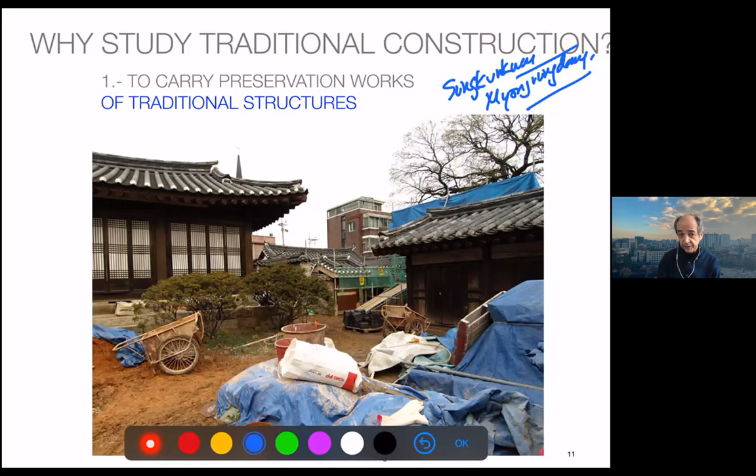sorry, to keep that heritage, and could be any monument, you need to be very familiar with those techniques so you will not spoil the building. And that's a very important part of the traditional construction techniques, right? And Korean traditional architecture has a difficulty there, but we will speak about that next day.

Then we have to extend and renew old buildings. This is the famous Gothenburg City Hall, renewal by Asplund. This is an architect which comes sometimes. This is the original building, which actually is a building which underwent many extensions and many renovations. And this extension by Asplund. And well, that building was controversial. Now we consider it as a model, an example of building extensions and renovations.

But Asplund used new techniques. It is a steel and concrete building, but he was very much aware of the materials, the composition, and he did many interesting compositional tricks to have this extension working well, right? Interesting building, you may study it because in terms of design, especially interior spaces are great.

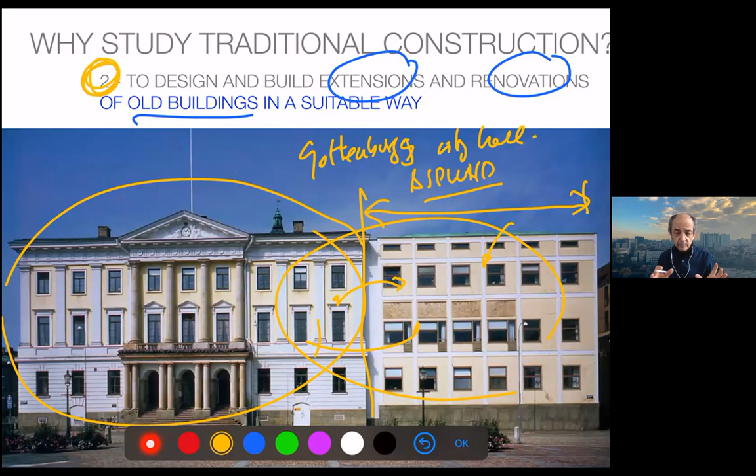So second point, and this is very important because since the 70s or 80s in Europe, and probably nowadays in Korea, there is more and more awareness of the need to really keep this kind of heritage of construction. This is part of our collective memories, part of the culture, and buildings are good as they are used, as they are alive, right? And this is one way of keeping those things alive, so we can read the history of a community through the buildings.

And interesting is the possibility to use those technologies in a new creative way. This was very celebrated a few years ago. It is a kind of a construction with bamboo and mud in a rural area, right? So it is using traditional materials, but in an innovative way, but still a way in which the locals can still use it and build.

We already commented, for example, about the use of rammed earth in modern architecture, and there's so many things which we are recovering as we know that we cannot keep overusing concrete and steel everywhere, right? Because there is a limitation, there is a huge ecological impact, and we need to build with some other alternatives. So these are 3 important points.

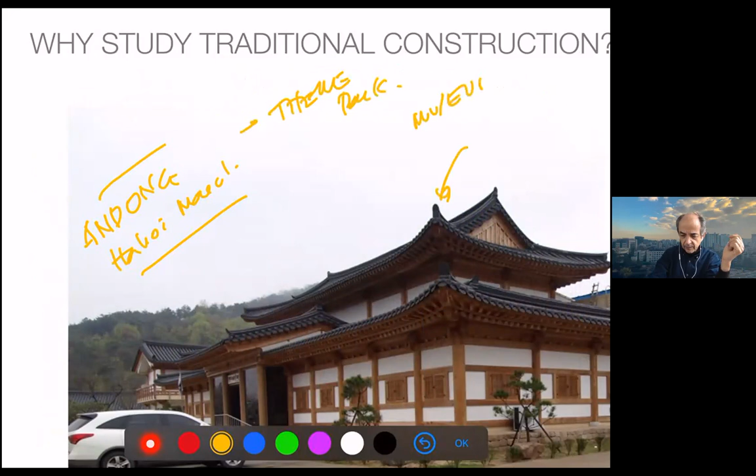But there's one more. This is Andong Hahoe Maeul, right? The famous folk village, which I visited almost 30 years ago, over 30 years ago, and many times afterwards recently. And now it became a kind of theme park. Well, this is the entrance museum and information center, right? The typical, which is using Hanok traditional style.

It's kind of a mixture because there are no traditional museums in traditional Korean architecture that I know. So it's kind of a mixture of palace, Hanok. I don't know, but well, there's an effort. I would question the use of glass at the entrance, but that's something that comes with refinement of those hybrid typologies.

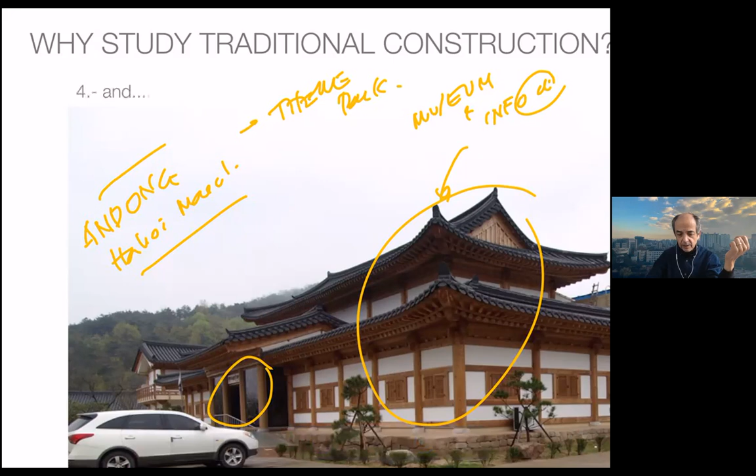But I was surprised that this building, which obviously was done with a lot of effort, a lot of research on traditional construction and with good builders, was so careless as to have this kind of continuation, right? I don't understand this trend to have a nice front and totally rubbish back at the end. Actually it would be exciting to have old and new, right? As a kind of tension, contrast, as Asplund did, but it's a small disaster. So if you know traditional, not just the construction, but the architecture itself, you can avoid those things, right?

So as a summary, we need to preserve the heritage, and that's an important thing. To keep this heritage, often we have to renew, to build extensions, and then we have to be very, very well informed of those techniques. And we can still revive old techniques which can be still used.

So, you go, well, which are the traditional archetypes? Actually, through the lectures, we commented already about the history of the use of the materials and basic techniques. So we have a lot of background already. And this is a repetition, right? We have 2 basic archetypes. This is Frampton citing Semper.

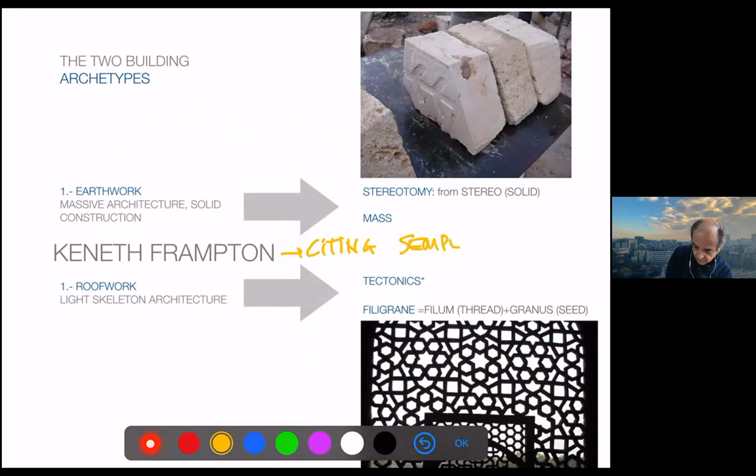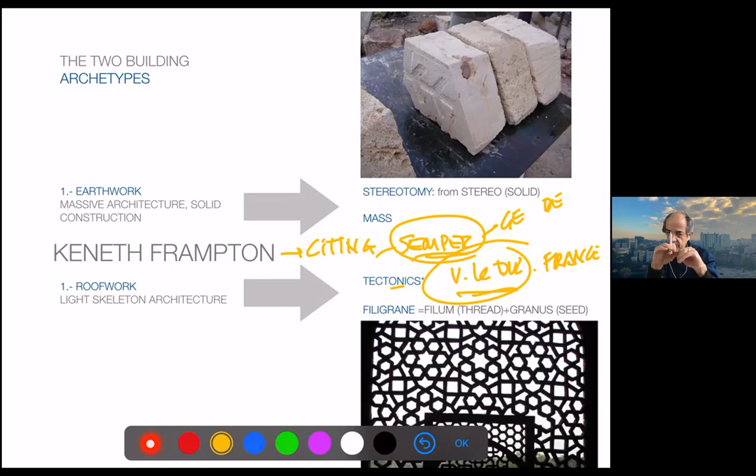Remember that we had two important architects in Europe who tried to unify historical heritage with modern technology and more rational, more scientific construction: Semper in Germany, and Viollet-le-Duc in France. They worked almost in parallel but had very different lines of work. Look at these two big names as the basis of the change from traditional to modern architecture and construction. We had the earthwork and roof work, the massive solid construction and the light assembly construction.

Whereas the difference with the Eastern, especially Korean, is mainly roof work. So there is a massive roof, this is true, but the assembly, the lightness, is an important part of the character.

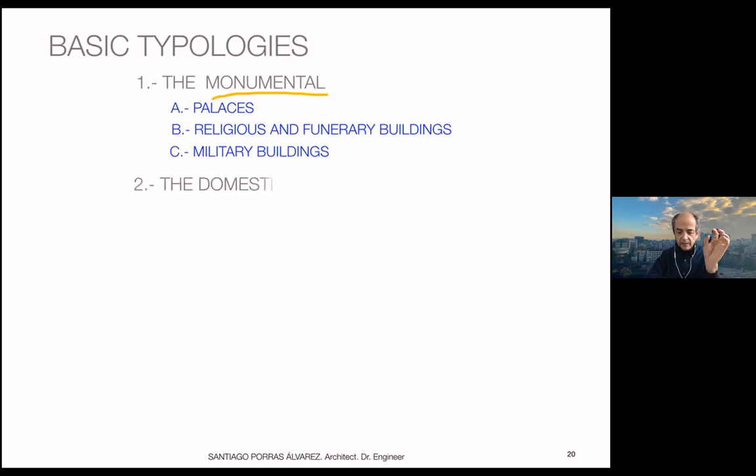And then we go to the typologies. We will go through the techniques - we cannot go one by one, this is why we have the whole course. Here we unify a little bit, but let's go into the typology - that's the part of construction which refers to the buildings, not to the construction itself. We usually study the monumental, which is the largest scale: palaces, religious and funerary buildings, and often military buildings also. Then we have the more domestic, which can be mostly houses, schools, academies, and sometimes universities.

So how do we get our knowledge about construction? Of course, the remaining buildings are a very important source of information - even the oldest, the Roman, Greek, as we saw, the Parthenon, even though it was destroyed in the 1600s by, actually, the Italians bombarding the Turkish. So you have to thank the Venetian guys for having the Parthenon destroyed. But there's a lot of remains, and that allowed reconstruction, analysis, and study of how things were done in terms of construction and design.

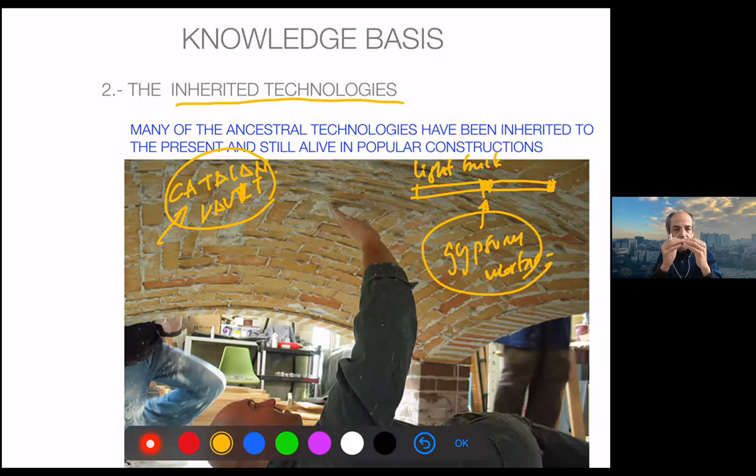Remember that gypsum mortar hardens almost instantly. This allows people to make those vaults on the fly without the need of a support. And this is what makes this quite interesting.

You need a very small arch raise to have a lot of strength, so it has been used for ceilings, stairs, and any kinds of constructions. You only need a string to make sure you have the arc perfectly done. You don't need any form, but you need to be really well trained, because gypsum mortar dries very fast, so you cannot correct your mistakes.

Curiously, in my school in Madrid, the School of Architecture, which is a huge school, one of the laboratories is about those techniques, and there is always a waiting list of young students wanting to put their hands in this kind of construction. Similarly, we have carpentry workshops and studies in Korea, where it's difficult to work the refined techniques of carpentry to make a proper hanok.

You also have the paintings, the colors, which are very hard to match. Actually, one of the complaints about renovations is the fake colors we see in monuments and so on.

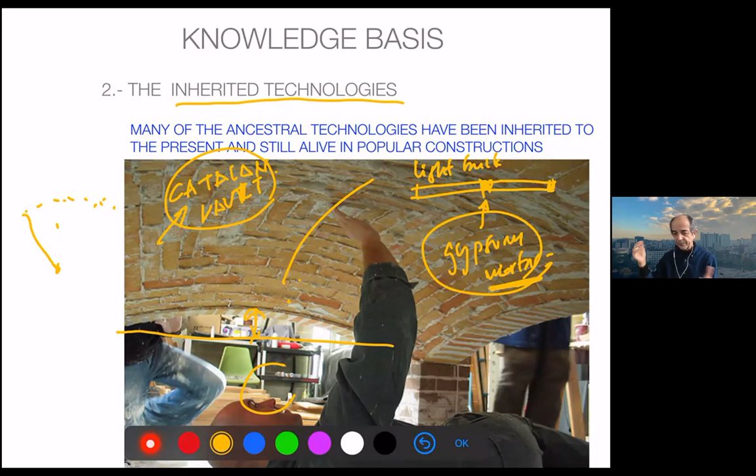But let's continue. Probably one of the most important bits is the written treatise. The treatises, or books, started with Vitruvius. We were very lucky to get the whole Vitruvius collection. This is more than 2,000 years old.

We were unlucky to have just the text, not the illustrations, so architects had to imagine all those images. But that set kind of a model which subsequent architects followed, and that happens since the late Gothic period. We have a Gothic treatise of construction from France. This kind of model inspires the creation of endless books since the 13th, 14th century up to today. So we have a lot of documentation, and they always wrote about technology, design, and aesthetics. That tradition continues, and I think we're lucky to have this.

So we have three sources of inspiration: the monuments, where there's still plenty of things to do and many techniques like the 3D scanner, the point cloud scanning. This is a technique that many universities are using to document monuments.

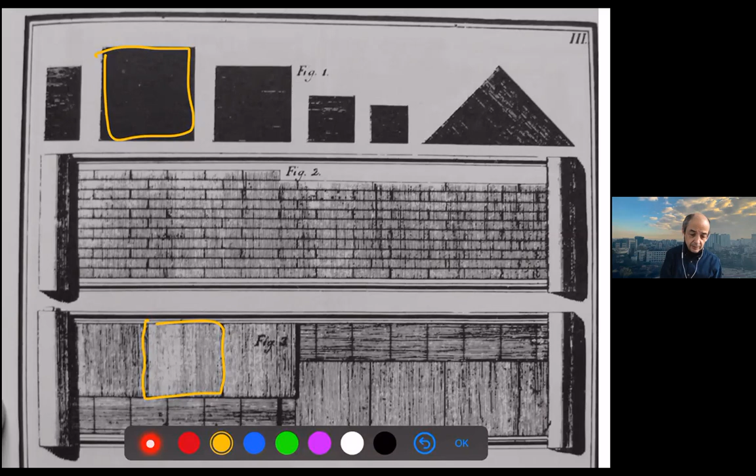Interesting thing is the bricks, right? Bricks are sized so that you can handle them with the hand. Obviously the Romans had slaves, so they could handle really heavy, larger bricks. Nowadays we've found that smaller bricks, and the Roman bricks a bit larger than the standard brick, are quite versatile, and we don't need to make such huge, massive walls.

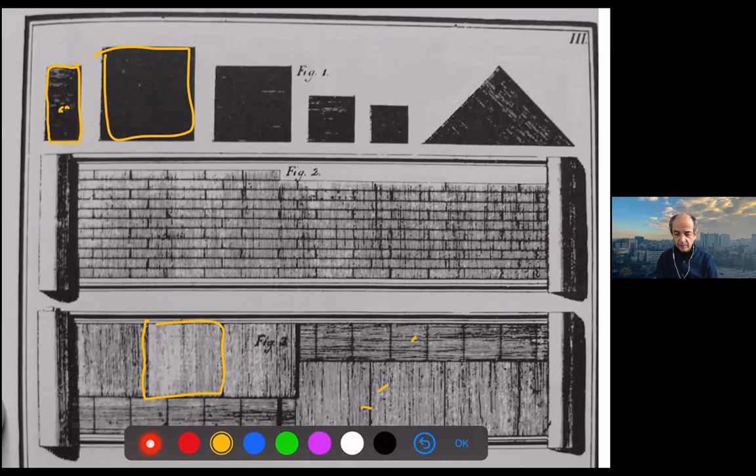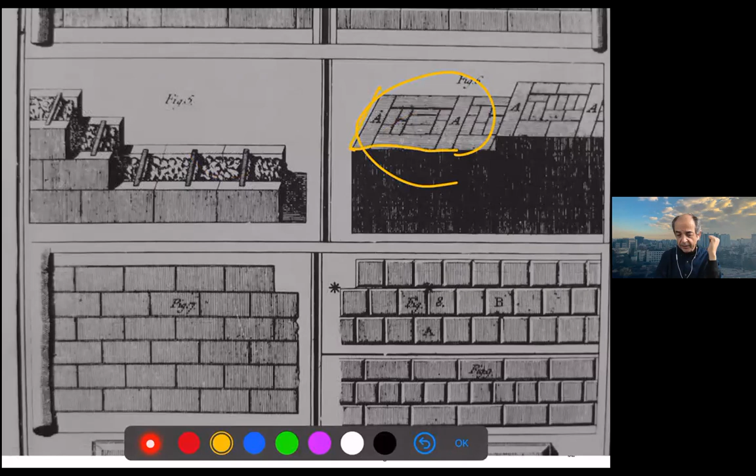The types of walls, the bonds we mentioned in masonry, was something which happened always—the concrete fabrics, or stone outside with bricks inside, to save money or material. The Greek way was to have the best stone on the exterior and lesser quality stones to complete the thickness of the wall, mostly for structural stability. Compressive strength is usually never pushed to the limit, but stability for the vaults is important. Or the Roman way, to pour concrete, and this has been maintained almost to the present.

Let's go to Palladio, which is more interesting. Palladio, curiously, writes books and also addresses technical terms. See how architecture...

Traditionally, architecture was about design, construction, and even, in a small way, planning, but even military and infrastructure—so architecture was about everything. Of course, the science included aesthetics as well. There wasn't this idea we have now of isolating only one part, because it's very hard, and even though we may specialize in one part, we have to be aware of everything else, so that what we do is really feasible and makes sense. It was so natural and so out of the question throughout history.

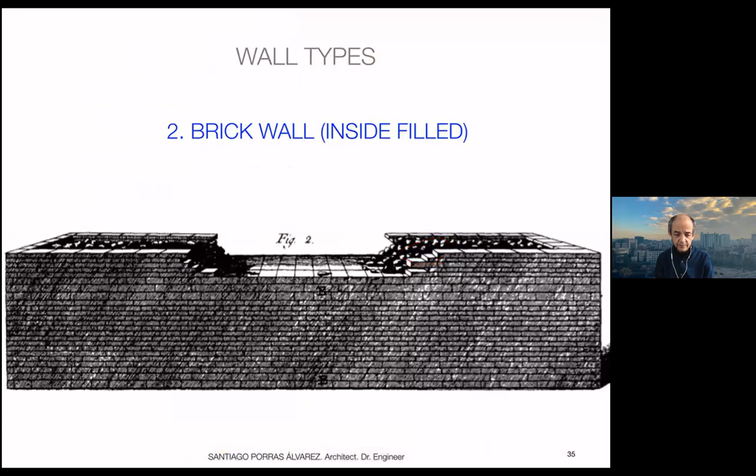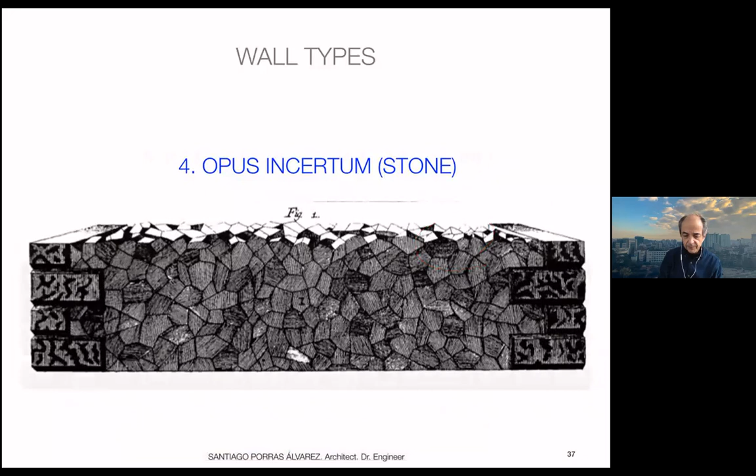I went too fast. This is a kind of wall which is still used today. You'll see very often bricks used to solve difficult points and to have some kind of ties in between, with the rest being much rougher concrete, let's say, just to provide the mass and volume you need. Only with the stone, you'll see this quite often in all constructions too. And then, more of a brick style, just pure stone.

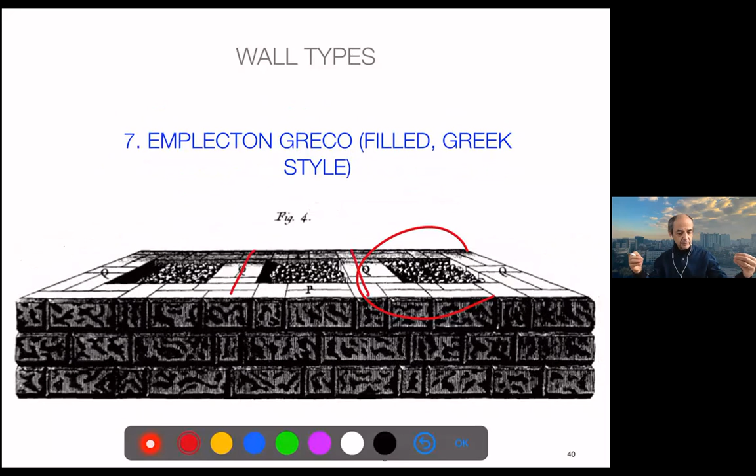Of course, the concrete wall, which is the cementicus, taken from Latin, is like a really modern concrete antecedent. It is not reinforced, but it is cast in concrete. The Greek style, again, you see those kinds of reinforcement ties—now we use steel clips or something a bit lighter, and so on.

That's regarding the construction of walls. In his first book, he speaks about wall construction, and vaults are important—once you have the walls, you have to make the vaults. That's true, but he mostly focuses on the geometry of how to make them. That makes sense—he doesn't give dimensions, but from the ruins you get an idea of the proportion, the stability, which is about 1 to 8.

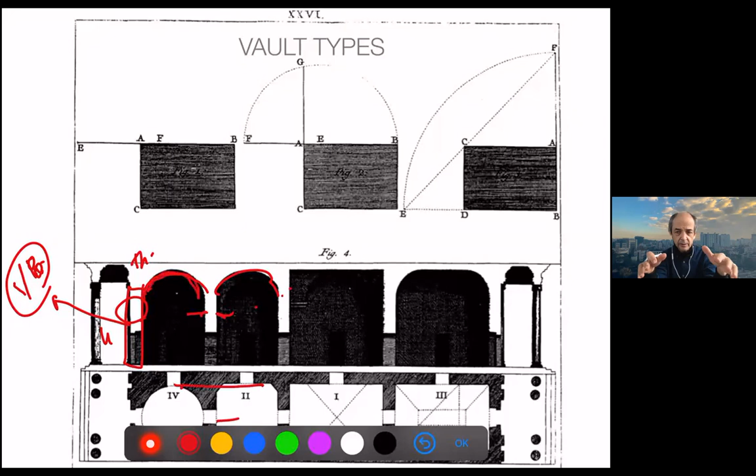So height and thickness will be like a 1 to 8 ratio—this is very typical. Also, if you have heavy vaults, you'll need a balance with counter-vaults and transversal walls to support those elements. The moment you have a vault, even a small arc is extremely strong, and you'll have to deal only with the vertical and horizontal strengths there.

But the buildings that Palladio proposed were quite simple, and the explanation of the balance is quite intuitive. This is a detail of another detail—see again what we see. This is explaining vaults, but this is mostly design.

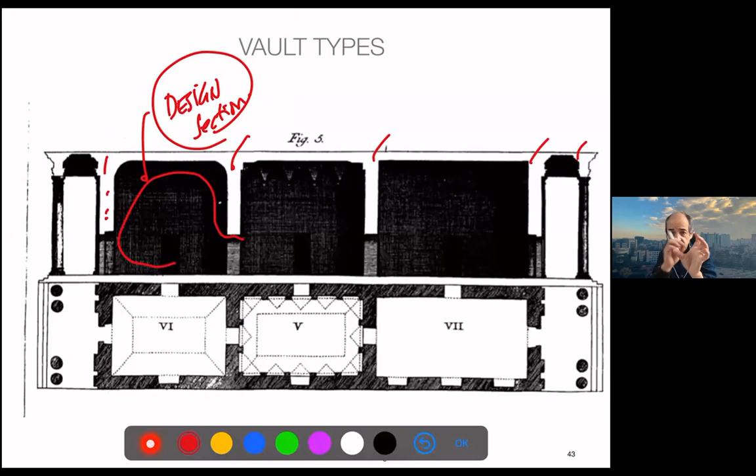Let me go back—design section, right? He doesn't explain what happens inside because he explained it before. What explains more is the space, so you don't need to fill the section with detailed instructions—you can work at a very large scale. Here, what's important is to see how this construction creates a given kind of space.

Curiously, in the section you have the shades to show the space, but in the plan you have a hatch for the walls. That provides a good background to draw the ceiling plan, which he also commented on.

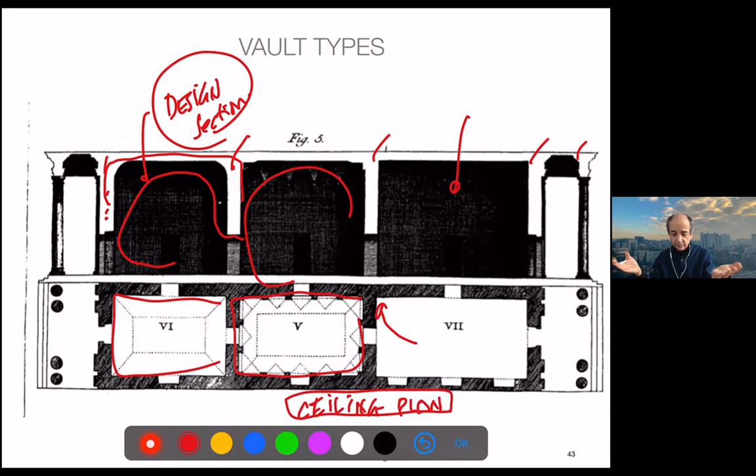In modern construction we very seldom make ceiling plans, but this is one thing we do, for example, always in interiors, right? You make flooring plans and then ceiling plans, which can be together or just separated as happens in this case. Let's continue.

And well, doors and windows. And again, Palladio doesn't give the carpentry details, but speaks of the proportions, which are necessary not only to have pleasant proportion, but to be integrated in the mechanics of the walls, right? Not to make them very weak. And then chimneys were important. It was the heating, right? So buildings need a chimney.

And most interesting is the stair design. I will stress stair because Korea has had already with Ondol a very sophisticated way of heating, much more than the open chimney. Doors and windows, again, the Korean carpentry is much in advantage, but the stair, traditionally in Korea, right, has not much stair tradition.

Korean hanok are traditionally one floor. Palaces have small in-between mezzanines, but it's mostly a one-floor kind of service space. You'll have stairs in military construction and the pagodas and so on, but it's not really the important stair to move easily and as part of the composition. And that makes, curiously, even today, Korean stairs a little bit weak in all orders, in terms of construction, design, everything.

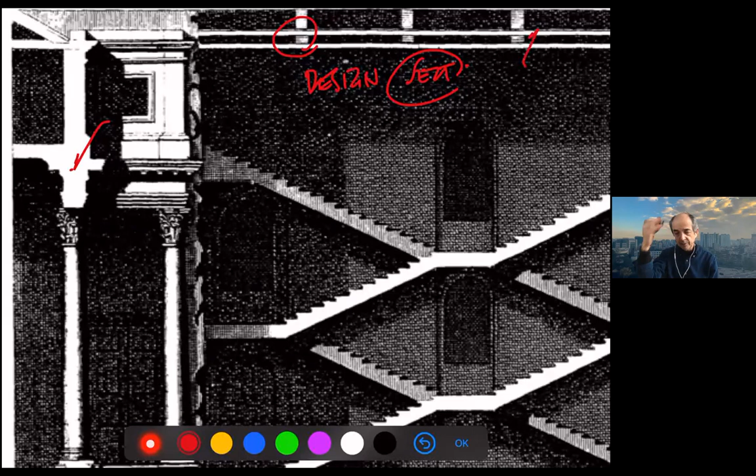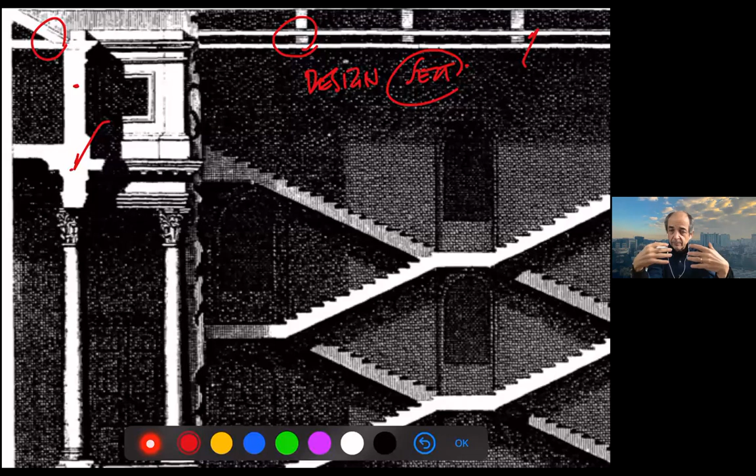Also, Palladio shows the structure of the roof, probably because this is open to the view, or because he thought it is not a solid part as the stone is. So the basic assembly of timber is shown there. I show this much in detail. We don't need to draw like people did in the Renaissance, of course, but those drawings are very expressive. They are very technical, but they give you a very good idea of the space.

We can use our render programs. It's not easy to work with render sections, but knowing this, we can just tweak and use them to have a beautiful section with shades, with much control, knowing the effect it will have in terms of giving you the information of the depth, of the effect of the building and the atmosphere inside, and even the construction inside, where you can see you even have the brick detail put there.

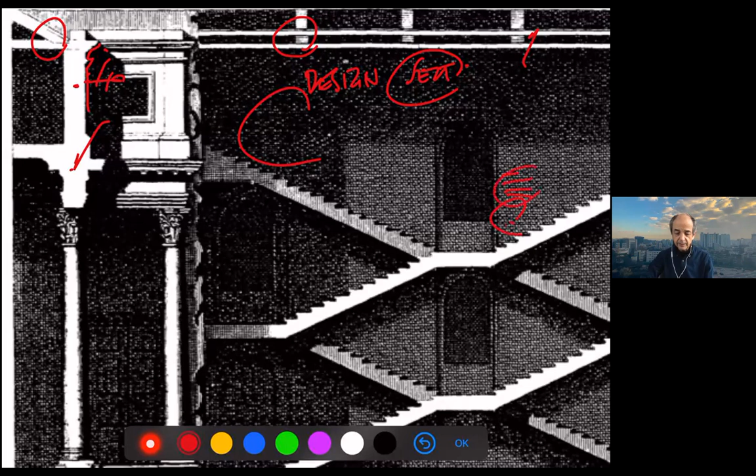So we will comment more on stairs later, because again, I think stairs are important and Viollet-le-Duc is a bit more technical. But let's go on. Roofs,

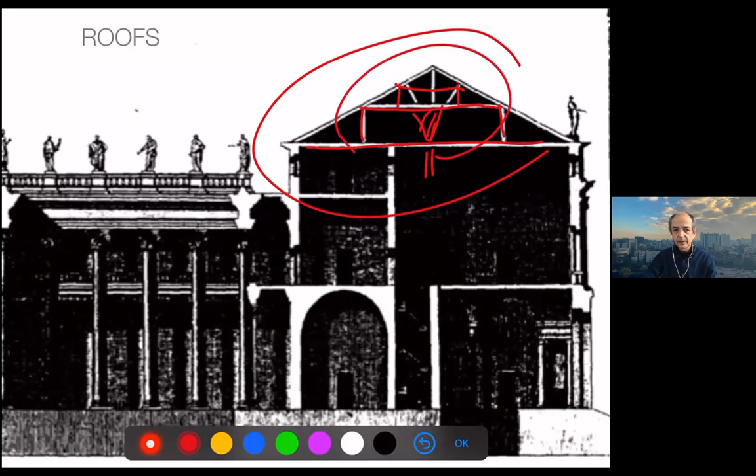Palladio did not work hard in explaining the thing, but everything we see is quite straightforward. Actually, it could be similar to the Korean truss for the roofs, right? Probably you may have an intermediate element and probably a column in between, but this kind of typologies in between what we see here in Hanok and what we have in here. Sometimes the load-bearing walls are enough just to support the rafters.

There is such a huge heritage of Middle Ages and Gothic buildings in France that he had material for a lifetime, and he did very well, right? And differently than, well, Palladio was studying Vitruvius and the ruins, so it's kind of balanced. Viollet-le-Duc tried to understand everything from the existing buildings,

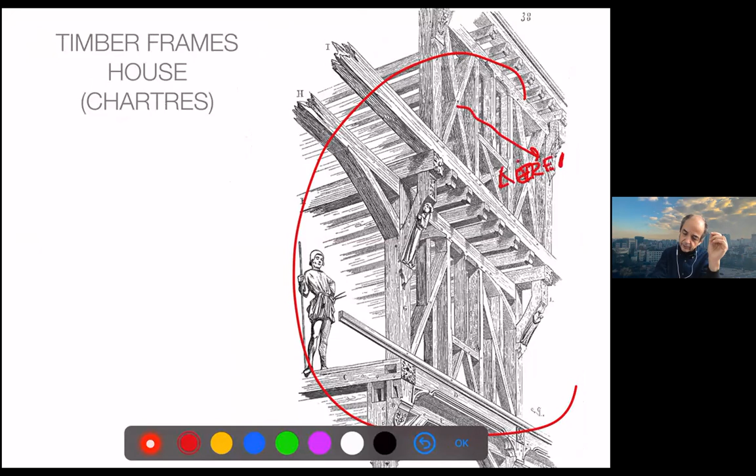And look how in a construction drawing, he takes care of the aerial perspective, right? And the atmosphere. So as you go farther and taller, things get a bit more diffused. That's something that is very hard to make in Revit, right? But interesting how precise and how meticulous was the reproduction of those wooden techniques. And he himself would analyze and criticize what was performing well and what were the problems, so he could improve those techniques when he was making the restorations.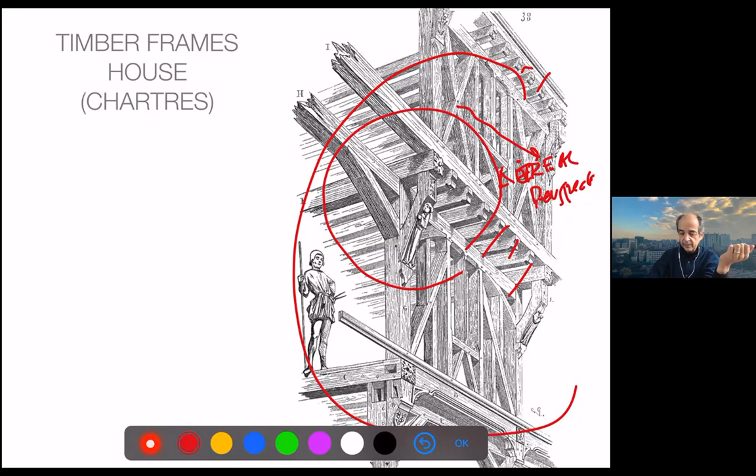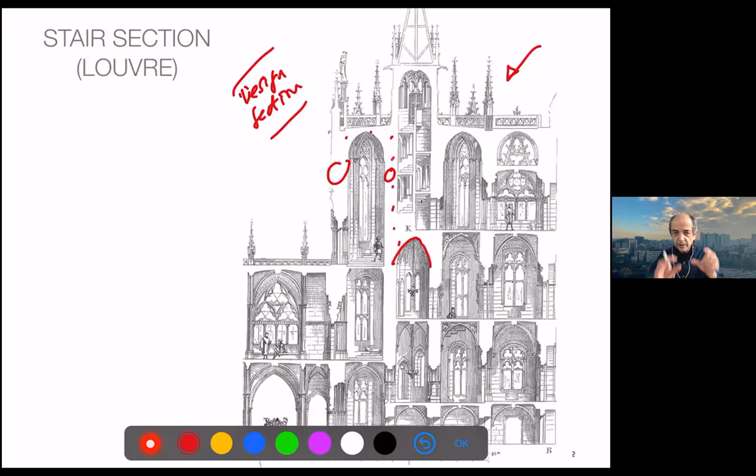Another beautiful section of the Louvre, the Old Palace in Paris. See again the interest of the design section. You have to know the construction, so you know the perfect thickness of the walls and the vault. But at this point, the drawing does not show what happens inside. That will happen in another set of drawings that he has. So it is helpful for us as a way of documentation, as a way of graphics, and also as an example of precision.

It is amazing that those guys were able to make those drawings with just pencil, paper, and a measuring tape, nothing else. And their own knowledge of geometry, of course, and their good drafting skills. With an army of assistants. But again, I think we can do this. Of course, we can work by hand, and it's quite rewarding.

But we can use our computer tools to have graphics which are at least as precise, as informative and as beautiful as those. Remember that the drawing is kind of an anticipation of the reality, or in this case, for existing buildings, getting as close to reality as possible, so you can have as much as possible the feeling of the building, not the abstraction of the geometry of the lines.

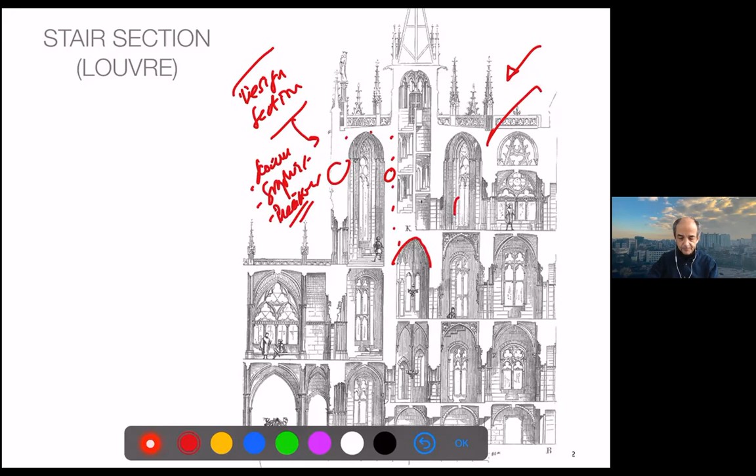So we will concentrate on one book. It was very difficult to choose because, contrary to Vitruvius or Palladio, Viollet-le-Duc's bibliography is enormous, but there's a tiny, small book about how to make a house, or history of a house. 1873 publication. It was translated into English the year after, so you can also find the English translation. Actually, there is an open format, a better scan than this, from the original edition, but I didn't have time to change the illustrations.

Again, this is interesting because this is the history of a house, so the construction from the planning to the ending of the house, with traditional techniques, of something which was a modern design in 1873. These are the techniques before steel and concrete construction, right? Masonry, timber, metal flashing, slate roofs, and so on.

So this will help us round the whole set of materials and techniques from the foundation to the roof, and also review a little bit all those techniques we saw through the lectures. So it's kind of an interesting review. Let's go into it.

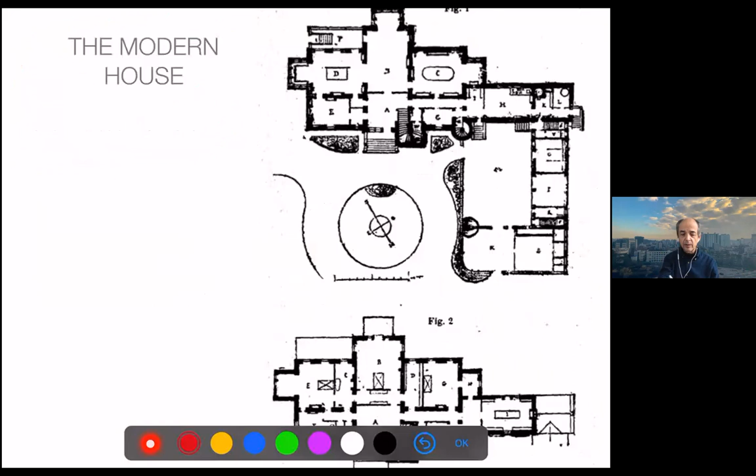So to explain the story, there was a rural family in France, and they had the old castle. This is the old-fashioned, not very modern and not very healthy building. So they make a new plan of a modern house, right? Modern. But you can see interesting things like integrating the landscape. So having an idea how you approach the building, probably with horse carts and so on, but you have plenty of space. The orientation, I think it's not here. Yes, here. So let me go back.

So almost all the house is southeast, which is one of the most optimum orientations for living quarters, right? So you have the dining room, the living room with an open window to the garden, main meeting room, and so on, and then working rooms and guest rooms for meeting on the north side, and working quarters. This is like a courtyard with servants' quarters on the northeast, right? So you have some morning sunshine, but they are kind of cool. They have the animals there and so on.

And there is a linkage between servants and the house, which is the kitchen, which sits in between. It's quite rational. And they have more floors, but I show the top. So the rooms are huge. You see the size of the bed within the room. And the bathrooms are huge also, but almost all rooms go to the southeast side, right? And the northern part is used mainly for family rooms, meeting spaces, stairs, and so on. So quite modern in some instances. And we see already how we can use the orientations with different uses. This is some of the things we commented before, and you see it very consequently done.

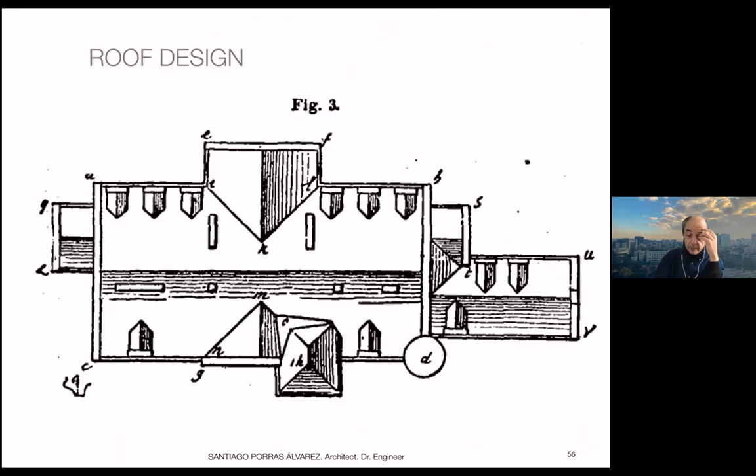Roof design. The book just tells you some principles of construction design, then it goes into the construction of the house. But see the geometry, right? So these are the slopes. We have the dormer windows, and always a small space for the water to be evacuated. When we have a small difference, that means that one roof is a bit steeper than the other, right? So if this is even steeper, it will become much more like this, right?

And the difficulty of having roofs clashing together. So this is probably a small slope to have the water running to the side, and this other. So there will be a line here on this side to collect water from one side and from the other, and to be taken to this point. So you see the interest of solving different difficult points that we commented in the lectures. We have another difficult point here, three slopes, and then a running point there.

And some people coming to class now.

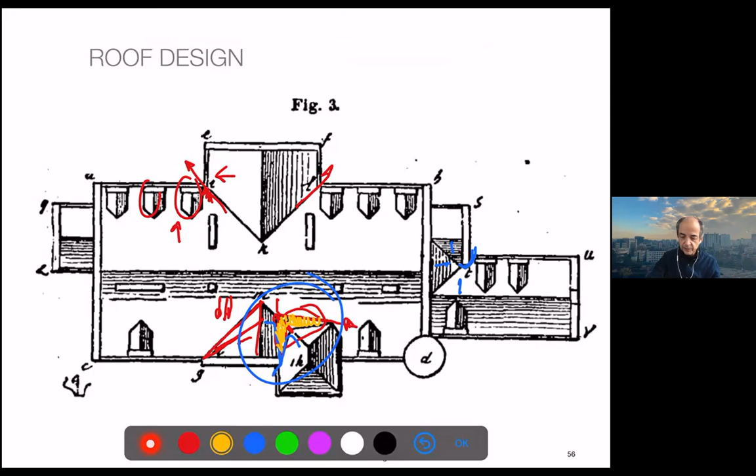So see this point here, which demonstrates to you the effort to make a nice sloped roof, but you always have difficult points to solve by creating new slopes, right? Instead of creating very deep points, which will just accumulate water. So you have 2 points to consider there. You can review your knowledge of geometry here.

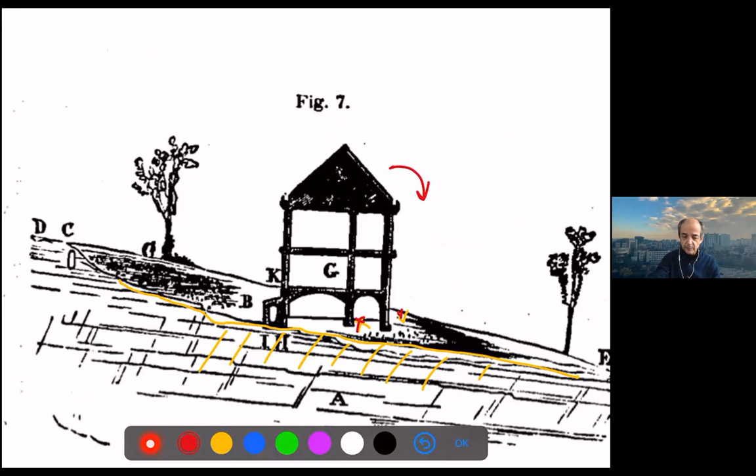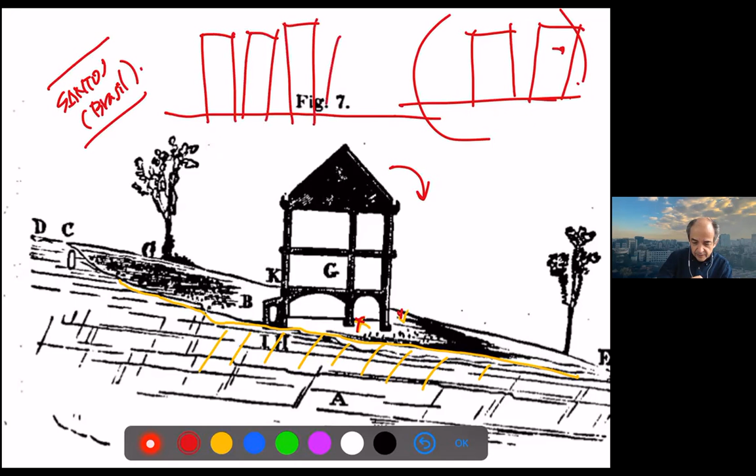Yeah, there's a famous case of a modern building in Korea. You have 2 apartments, 2 small mansion buildings, in which one is totally slanted, right? And we have some cities. You can look, this is interesting, Santos in Brazil. It's a huge city on the beach, and all towers are very tall. They are all slanted, and all the owners are wondering whether this will collapse or not, right? This is quite a unique city.

And this is the case of having tall towers in a very soft layer without having enough stability. Well, there are many famous cases, but this is so much common sense, and this appears in the first few pages of a book for a general public. Whenever you build whatever, you need your geological study. For a skyscraper or just a 1-family house, this is very cheap. Whatever the cost is, it's much cheaper than the cost of the building moving down.

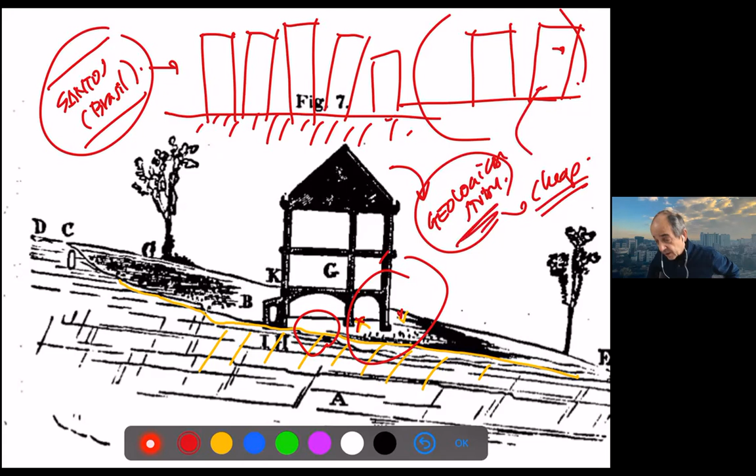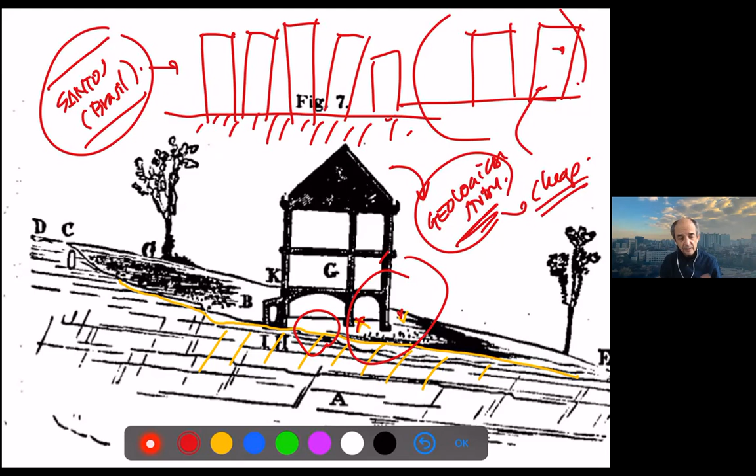I cannot understand why so many Korean developers still want to save money on a proper geological study, because they're very, very bad ones, and also the proper measurement of the plots. So you can start with the precise dimensions. Otherwise, what's the meaning of making dimensions in millimeters of the wire? Okay, nice drawing, an interesting point you want to know.

The basement excavation, I don't need to explain because you know already what this excavation means, why the walls are much later, and see how the foundations are always given a little bit of margin, because we have the weight of the element, right? So we want to have this axis with some diffusion area, so the tension will be a bit more shared and centered, so the pressure to the ground will be mostly uniform. You will have problems of imbalance, right? So important thing there, and the space you need just to complete the work on both sides, right?

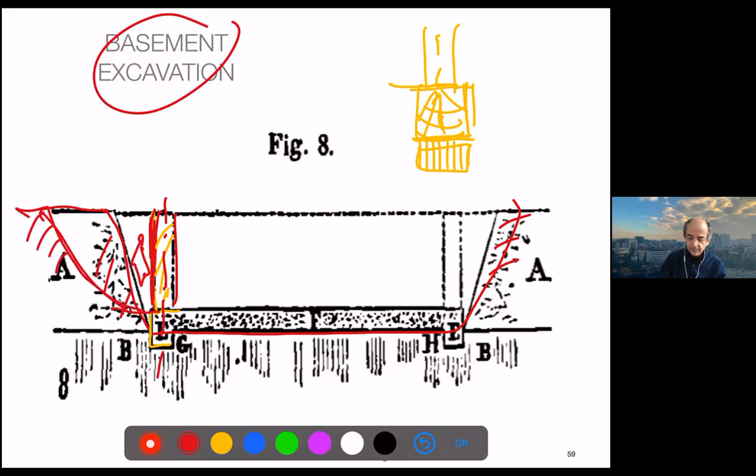In this case, a bit tight, but nowadays we are more concerned with safety, so we open a bit more to have a bit more space. But the way of building at that time was a bit different. So they didn't make this kind of waterproofing inside and so on. The construction of walls, this is the detail we missed in Palladio, but really Palladio buildings were built in the same way. See the thickness of the walls, this may be 80 to 90 centimeters. See the dimensions taken in meters, right?

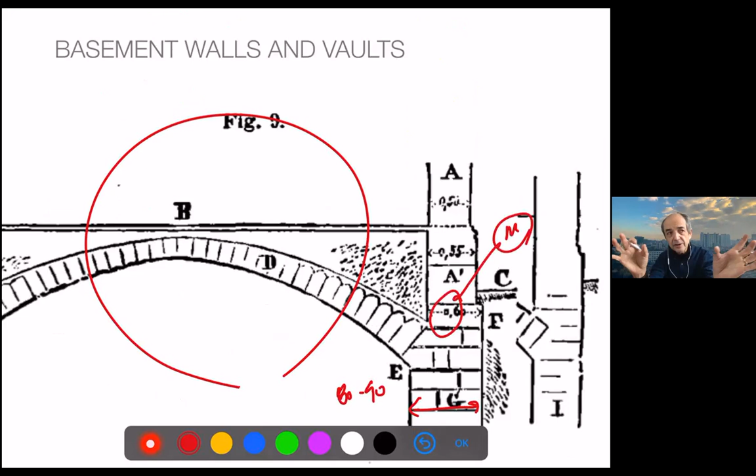The 19th century was the triumph of the metrical system, right? Of which France, Napoleon, were the leaders, I think, right? It was kind of making everything rational and so on after the French Revolution. And just as an expression of that, Viollet-le-Duc was French, and he was using the metrical system very much with rigor. Now we would use centimeters mostly, it says 50, 80, 90 centimeters and so on, right?

60, 50 centimeters. And you see those dimensions, of course, you need a thicker wall for the vault, right? But usually the ground will help with the pressure on that side. But you usually have that kind of 1:8 proportion on the load-bearing walls, which is a proportion which is not bad to have in mind.

This proportion, just by coincidence, but there must be something about the mathematics, is also like in towers, right? What we consider the limit of slenderness of a tower to be stable, right? You often see 1/8, 1/10, 1/7. Yeah, there are opinions, there's a small range, but this is an interesting proportion that you will see in construction.

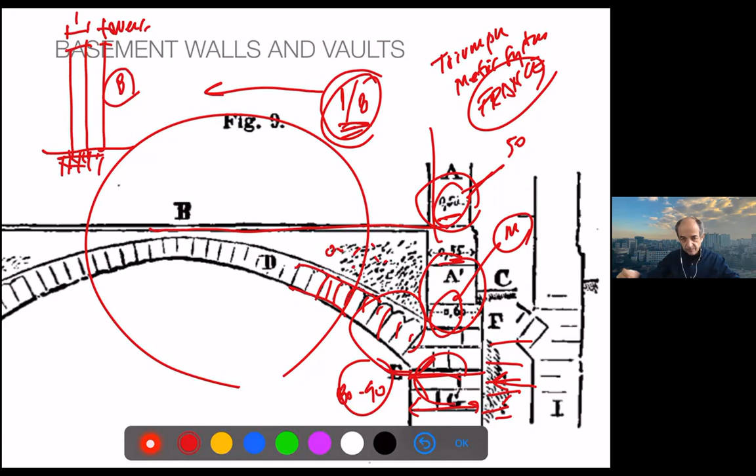Of course, to have a floor with a heavy vault and very strong vault, you can just fill it with sand or light volcanic stone or ashes, so you have a flat ground there. This is another of the illustrations which is important, like the section perspective.

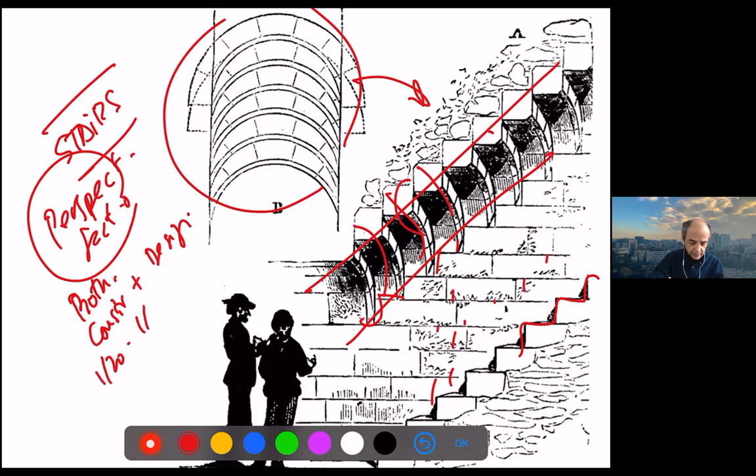And again, this is showing the construction. The perspective section is very useful. And here you see both construction and design. So you're showing the assembly, but also the resulting space. And for that, you need a large scale. This could originally be a 1:20 or 1:10 scale, more or less, right? So you have enough detail to show whatever we're explaining there.

Some of the problems he saw in old buildings with long spans, which affect the very slim bearing walls. So Viollet-le-Duc proposed to have a strong stone element in which you will have the floor, but you will have a larger weight on one side. So both together may compensate to have a much more centered load. So the unbalance will not happen as it happens in those elements, where we have a big moment acting over a weak element.

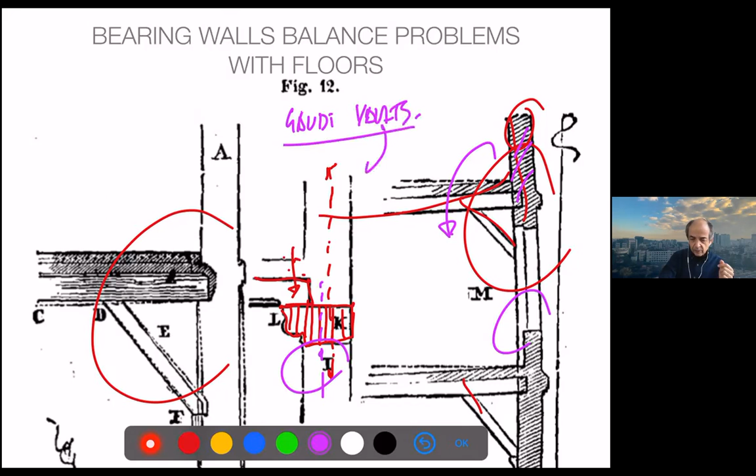Interesting thing, you might Google it: Gaudi vaults. You have a lot of this kind of physical, graphic study of loads, right? And he used it to get the building permissions, because nobody would believe the buildings could stand, but obviously they stand till today. Well, an interesting thing, which is telling about making a beautiful building, but also making it stable and working.

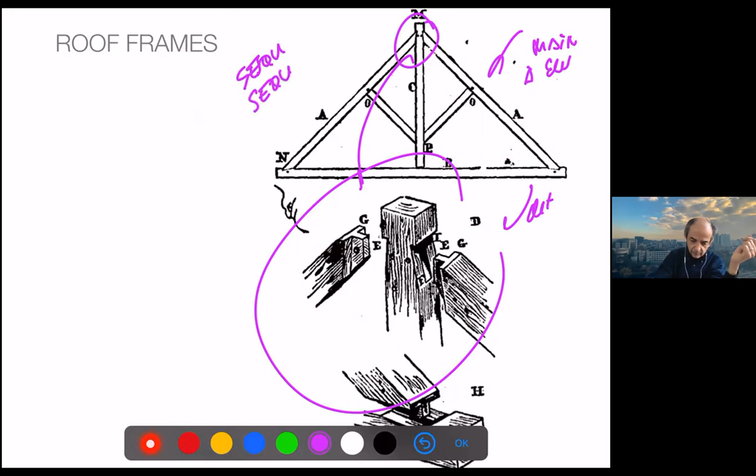Assemblies of timber. This is again one. See again the way of explaining things. You have a main elevation, right, and then the detail, to which you can relate perfectly. There's not this kind of sudden detail from a very abstract drawing. This is what we call the sequence of scales, right? Sequence of scales.

And all those guys from the classical tradition and academia are really good. By the way, Viollet-le-Duc was against the Beaux-Arts. He created his own school of architecture, which still exists in Paris, just to go against academia and to do something more modern in that time.

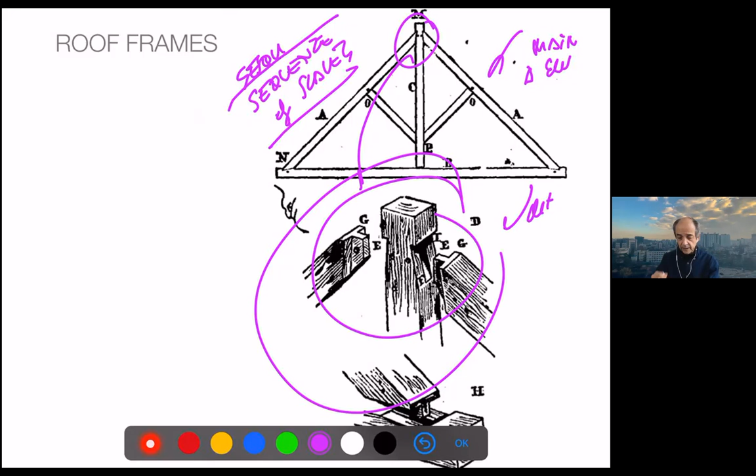And well, we're speaking of the detail of the assemblies. In this case, you use the 3 dimensions to show the assembly just by adjustment of the pieces together, right? The problems of the cutting and the parts of the wood, this is something familiar.

And the roof framing, again, we have the perspective section, which shows very well the strong masonry element of the building, and then the frame, which is designed in a way that lets the maximum of space stay in the house. See the slates, it is familiar, right? Even if I don't tell you anything, you will understand perfectly every single detail here. And you see that today not much has changed from before.

This is in large part, see how the full structure is kind of floating. Floating is too much to say. So you have ventilation over 2 dormants, or dormers. You know, these are elements which are not structural because the structure is in the bottom, but it helps to unify the load.

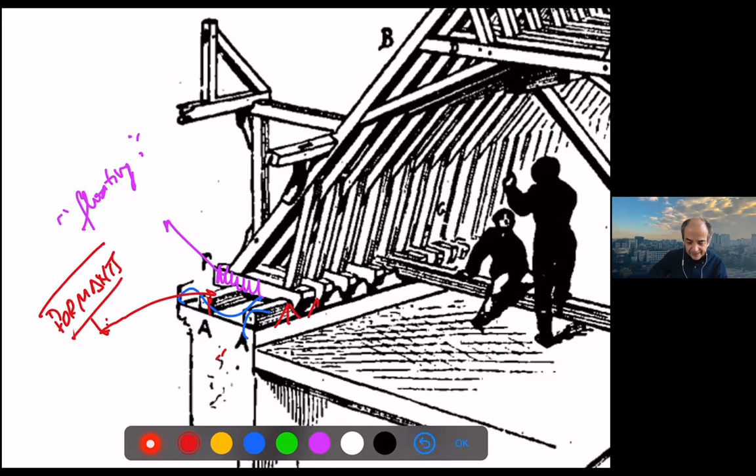It might have some asphalt in between to avoid the humidity, but it allows the structure to have a perfect setting to avoid strong punctual concentrated loads in the fabric. And this also allows a longitudinal tie to the whole masonry. So the masonry is not solid, it's made of stones, right? So they are separated. And those dormants will also tie all those elements against horizontal movements.

They will give this kind of perimetral belt to have better stability in the whole roof. This is an interesting construction point: when you use timber with fabric or concrete, you may consider this detail, which we still use with variations, but the principle is the same as what we do today.

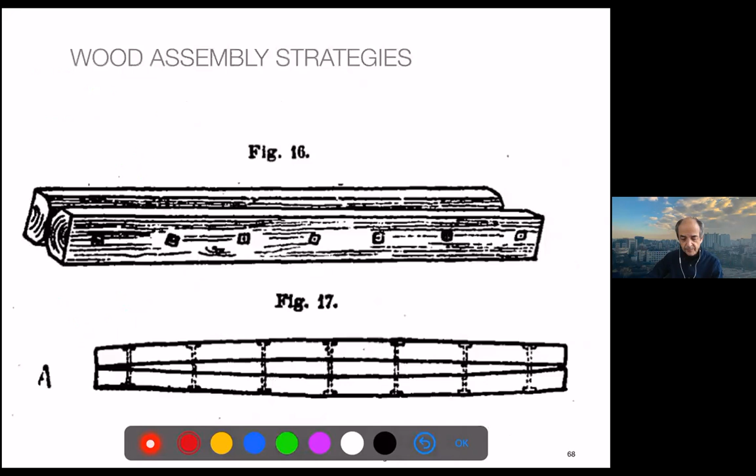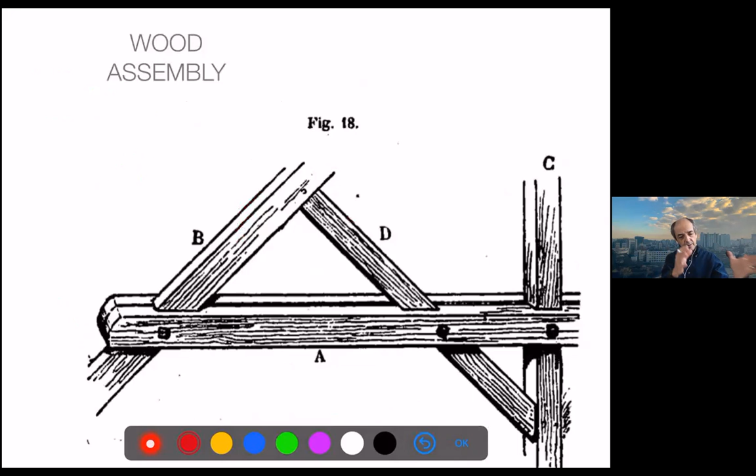Tricks to deal with the sort of the timber, and again more details of assembly. I bring them because once you have the big drawing, you can start explaining all the details. And then we start with the construction and see the importance of those structural plans.

So knowing the structure is essential. We have to start from there. And this is what we did in the alternative assignments. We know the structure, then everything is easier.

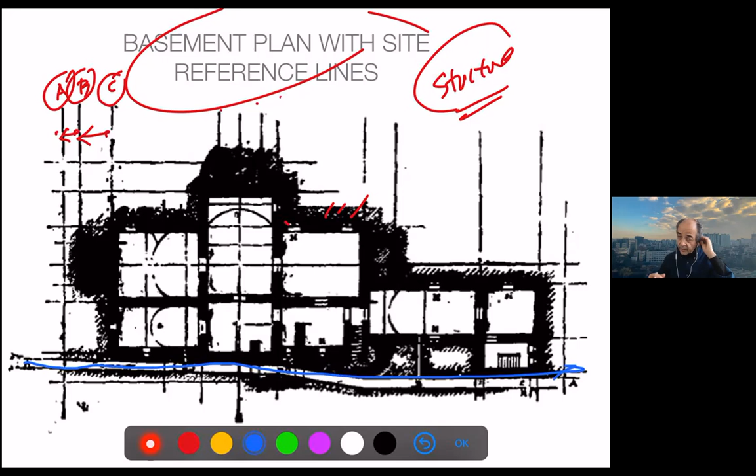See here the drainage space we commented before in this section. And then what we do on site, this is extremely important because we do the same today.

We put on those axes again, so this would be probably A, B, C, right? The measurement tape, just stretching string, we have a perfect line. Then to have the right angles, we can use the two diagonals to check the distance, or the famous 3, 4, 5 triangle, which you know is a perfect angle, right?

And then when you have those strings, people just draw the plan on the sand. And we'll see a close up of that area.

But you see, I don't know the English name, but it's a kind of small wooden structure in which you will attach those strings and pull them. You're very precise measuring this point. So when you work, you remove the string, but you have the point and you can pull it again.

And this is far away from the end of the building, so you will not need to touch this element. So at any point of the construction, until you reach ground level, you'll be able to check everything is in that point. From this line, it's very easy to take the dimension to find the position of a window or whatever element is dimensioned on the building.

So this remains until the building is already set to the ground level mostly, and then the building itself will be the reference for the upper floors, and you don't need this anymore.

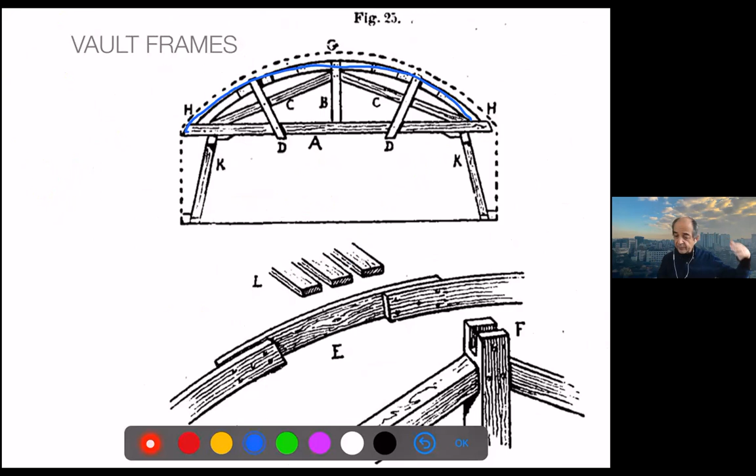Then this is what we built, what we do to build the vaults, and we always need a kind of wooden form to sustain the stone, unless we use those kind of Catalan vault we saw before - then you don't need it. The detail, again, see how as we go up, the axes are not always kept.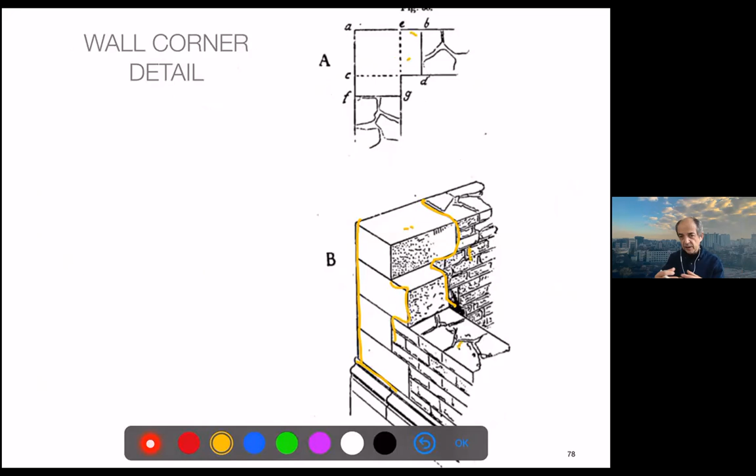The detail of the corners, remember that we said in curtain walls, but in every building the corner is important. So you will have more care, not only for aesthetics, but to make sure those tensions in the corner will be very well supported, not with the small elements which may have more tendency to break.

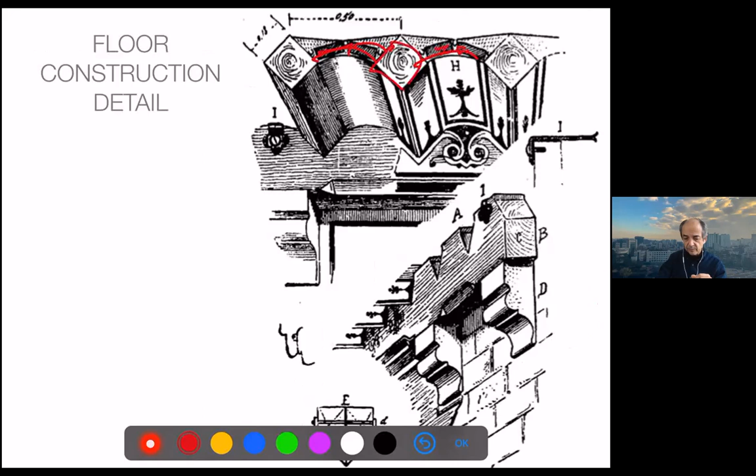This is like the brick walls we saw before, right? Put in diagonal to make it easier. More details, I will not go into.

Very basic advice on how to cut stone: avoid corners because they may spill. The same as with facades — avoid cutting elements too thin because they will break. When you have, in plan or section, some corner, this kind of detail is also very weak because it breaks easily. You will try to use the full element on the border. Of course, if you can, a more solid element is better.

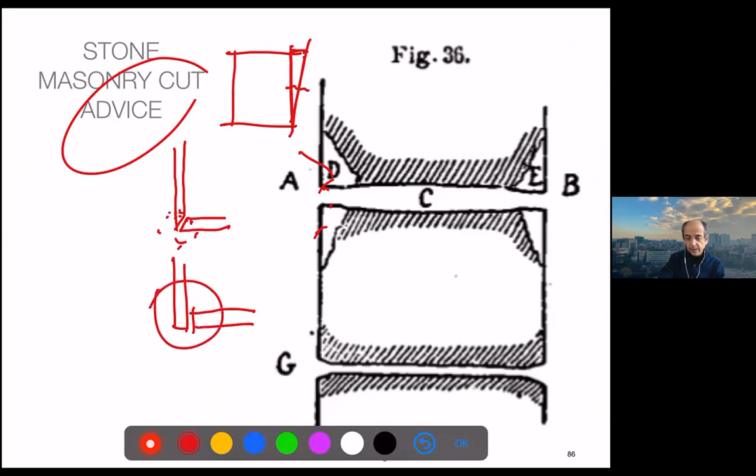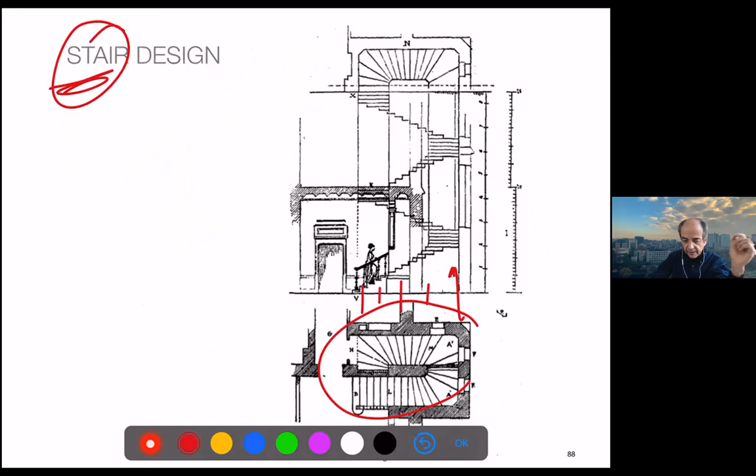This is just a good illustration of a stereotomy. And again, the stairs. See the effort to have plan and section together so we can relate them perfectly, and to count all the steps — like 30-something and 20-something to the other floor, with dimensions in meters — so you can have the perfect position of each, and they have to be all equal in height.

And then in length. When it is straight, when it is turning, you have the same dimension at the axis. We'll comment on that a bit later, but this equal height in the steps is my fight with Korea.

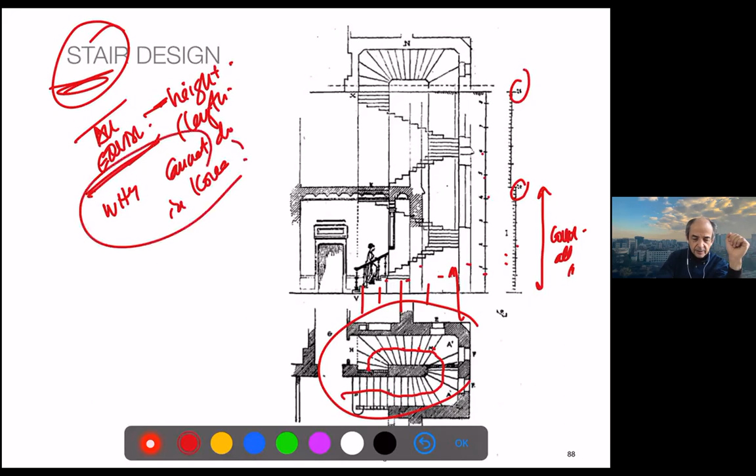Why can't this be done in Korea? We always have different dimensions at the beginning, in the middle, at the last of the stairs, and suddenly the last floor is much higher. And this is so dangerous.

It's just planning — the same as we say in plan, in section: you draw the wall in section and then make the stair, and you can be precise. You only have to foresee the finishing. The problem in Korea is you may have an ondol and a much thicker floor in the ending space than in the intermediate, which is a bit smaller. But it's something you calculate ahead, so you make all the steps together.

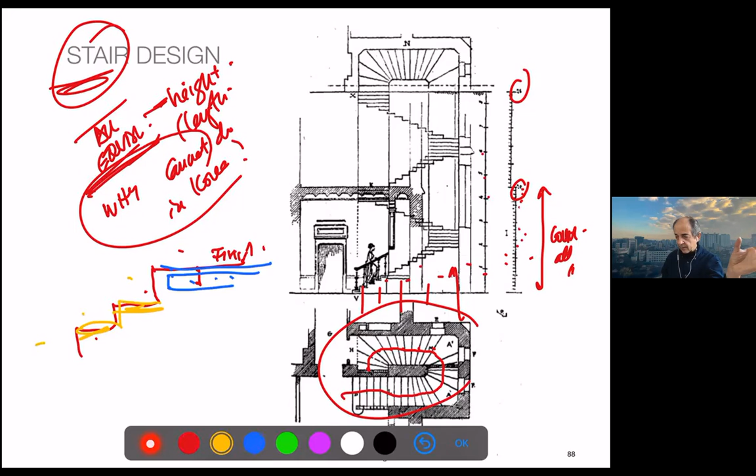I think 90 to 95% of stairs do not accomplish this, and this is my fight. I wish that when you make stairs — which are an element where most accidents happen, most accidents happen in domestic houses, in domestic spaces, and one of the most common is people falling down stairs — this kind of irregularity is one of the things that makes those accidents more likely to happen.

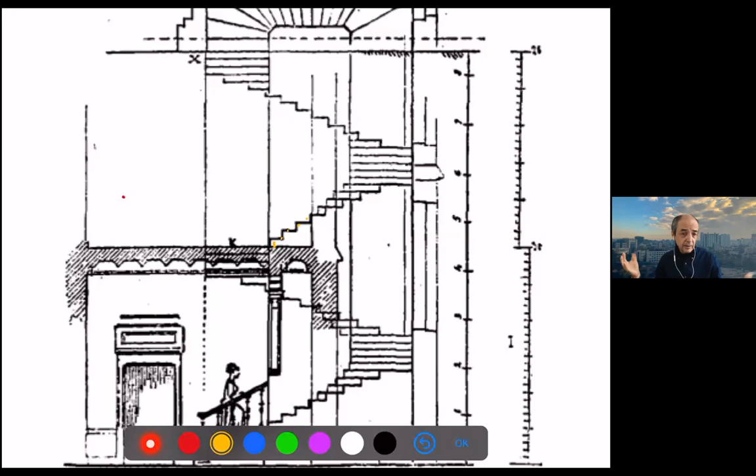We have only 5 minutes to finish, so let me go fast. This is what I said: be very careful to make sure all steps are the same. When you design, when you build, when you control, make sure there's no error, because people will say yes, yes, yes, and then in the end — oh, how's this so? It happened to be larger, and we cannot change it because the stair is already built. This kind of foresight matters.

The other thing, I'll go very fast — we have rotating stairs. This is what we call compensated steps, not sure about the English grammar, in which instead of making a radial position of the steps, you move them a little bit so you have a minimum distance in between. Anywhere you go through the stair, you don't have too narrow spaces — you compensate a bit, and instead of making it perfectly radial, which always varies, you move it slightly to make sure all the steps have a reasonable distance.

In this case, some people come in to make the final attendance check.

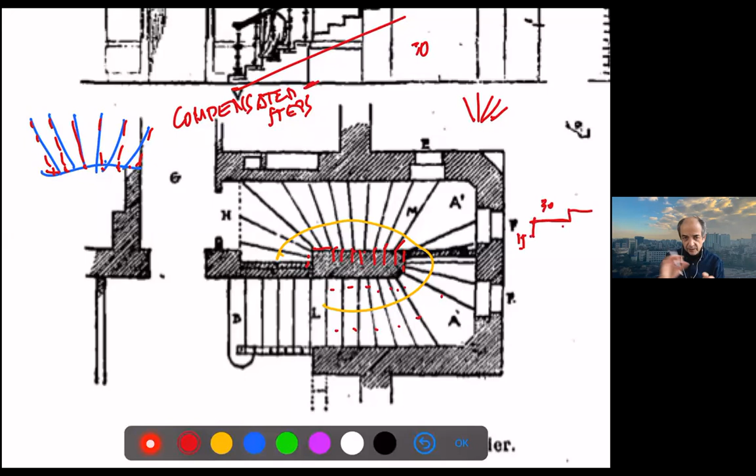In this case it was also a very nice stair, about less than 30 degrees, maybe 15, I don't remember exactly, but about 30. So it's very, very soft and nice to climb. Again, the details are very ingenious in how the stair was made.

Then we always have to make a facade section. Look at the drip with the position of the windows and all the dimensions. Remember, this is the dripper, which sits a bit high but still protects the window behind it.

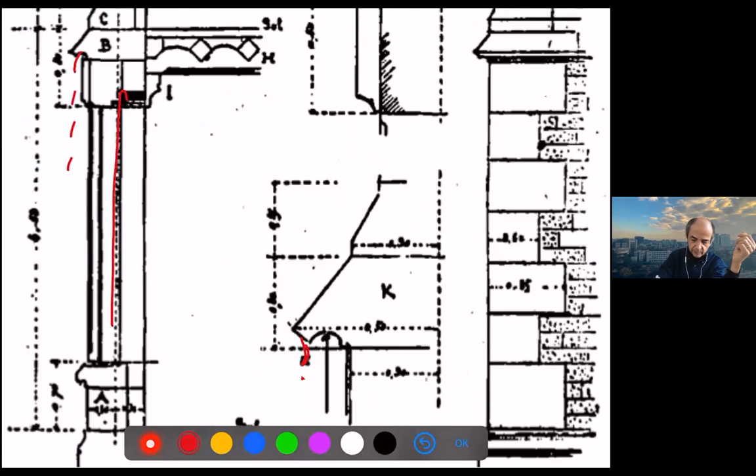Comments on the windows, the moldings. Again, this is not only for keeping the water out, but also for the effect of light and shade.

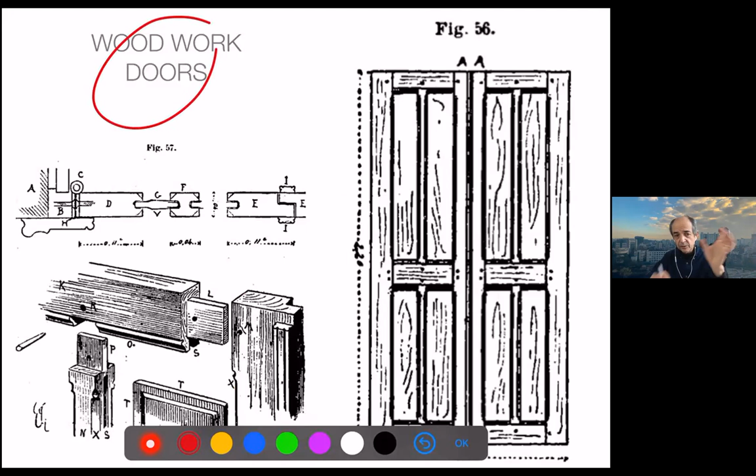In this case we also have the gutter around there, and the assembly of the doors. When I graduated, still we were doing, or the generation before me were doing, the design of the doors and windows in wood. This is quite interesting.

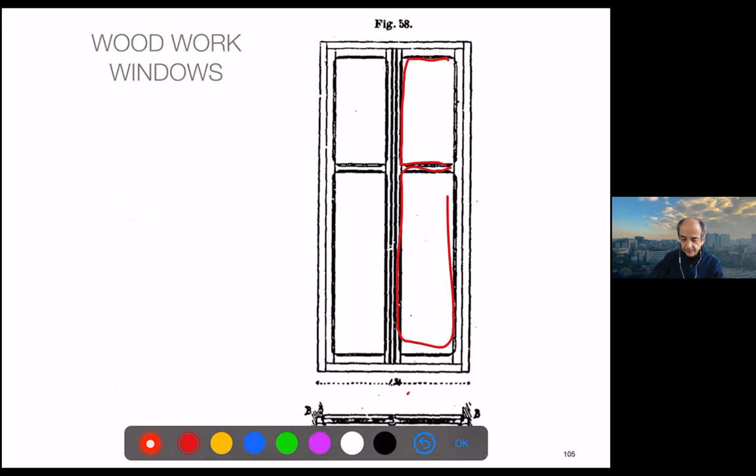Also the windows — interestingly, this one has quite large pieces of glass. But see this section, we don't need to explain much; you'll understand perfectly, even though it's not the same, those drippers, this chamber here, this channel on the bottom. The window has only one connection point, but you could have one more extension there for a better closure. Still, the details we make now are not much different.

Some strategies to avoid air gaps when you open the two windows, and the basic dimensions, 4 by 7 centimeters, a dimension we still use today in windows.

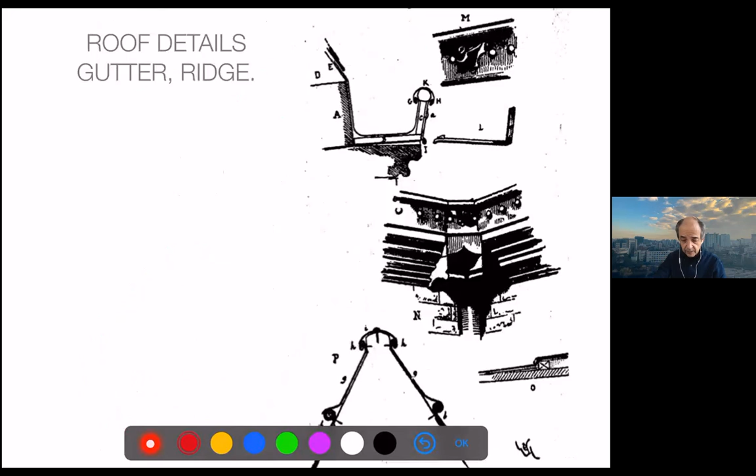The roof, the slate, no comment — this is exactly the same as we saw before, again the detail of the nails, and then the gutters and flashings with the seaming on the ridges. All familiar. And then the house is finished, and that's it.